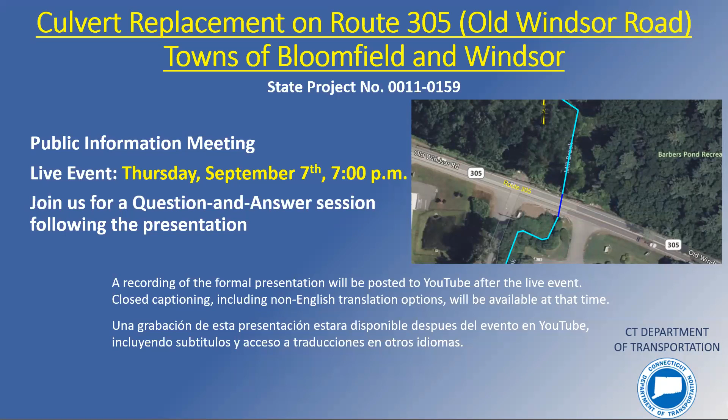This meeting will begin with an introduction of the team working on this project. Then an overview of the meeting format will be provided, along with details on how to submit your comments or concerns both during and after the meeting. Next, we will present the proposed project, including the purpose and need, the design plans, and rights-of-way required, and an overview of constructability and traffic management considerations. Then we will end with a live question and answer session here in Zoom.

Now to introduce the design team. For State Highway Design, Scott Bushee is the principal engineer. Joseph Arsenault is the project manager. Again, my name is Byong Kim, the project engineer. Kevin Osowski is the project designer. For bridge design, Zoltan Kanyo is the project engineer. Matthew Giannakopoulos is the rights-of-way coordinator.

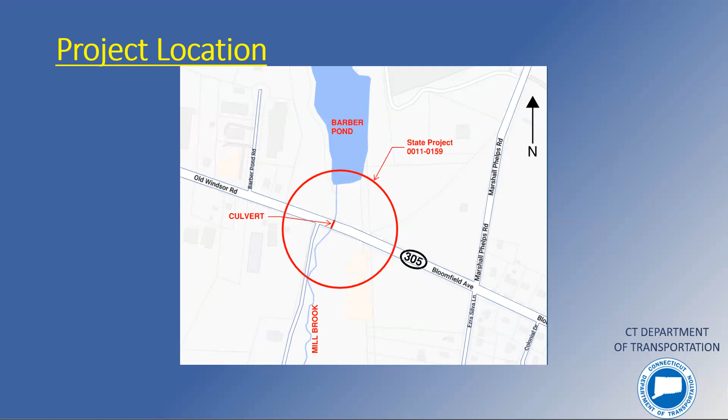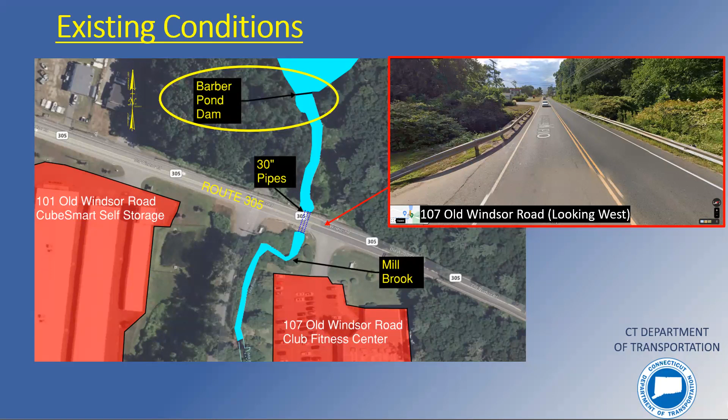The purpose of the project is to resolve the recurring flooding of Route 305 at the Mill Brook crossing. The existing 30-inch pipes are hydraulically inadequate to handle the flow of Barber Pond, resulting in frequent flooding of Route 305. This flooding occurs as low as 2-year storm events. The end wall is also in poor condition at the outlet.

I am going to hand the presentation off to Kevin to talk about the proposed design.

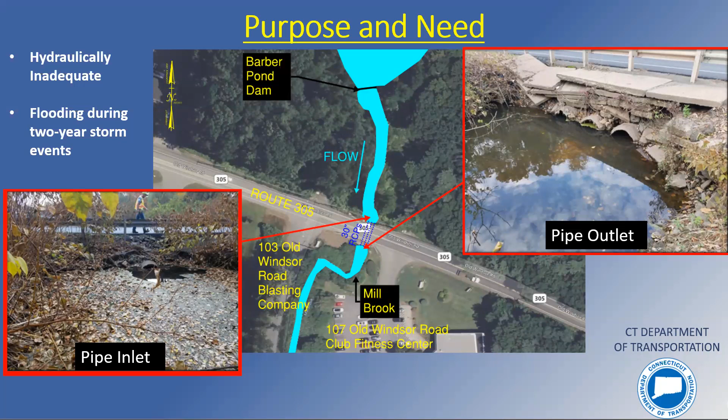Thanks, Byong. Hello everyone, my name is Kevin Osowski, I'm the project designer, and I'm going to go over the proposed changes. For this project, the existing pipes will be replaced with a 20-foot wide by 8-foot deep box culvert. The roadway will also be raised by a maximum of 3.5 feet. These two changes combined will work to prevent flooding, as the roadway will now be above the 500-year stormwater elevation.

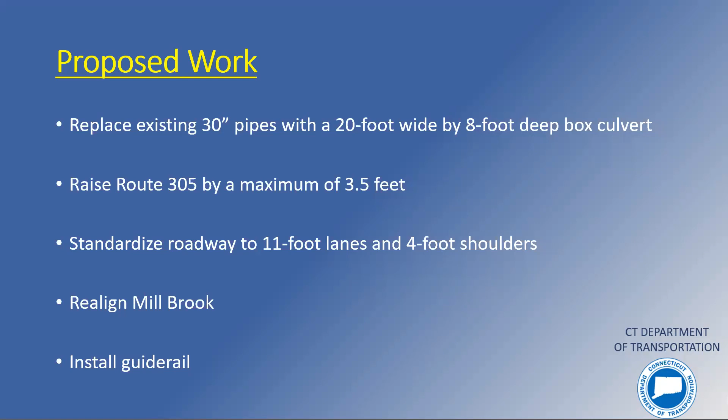Route 305 will be standardized to have 11-foot wide lanes with 4-foot wide shoulders. Mill Brook will be realigned to provide a more direct flow path. Guide rail will be installed along the project where necessary.

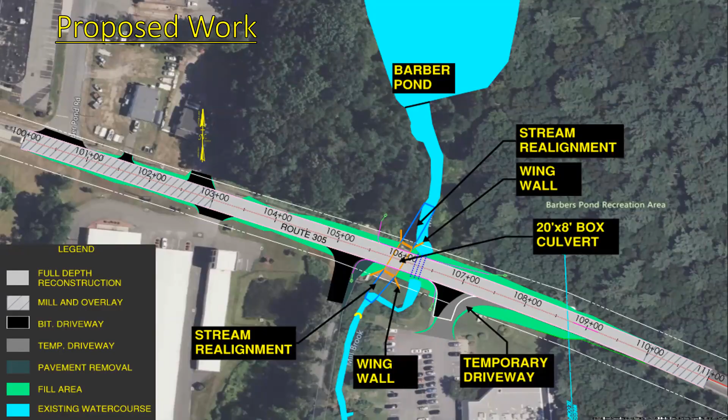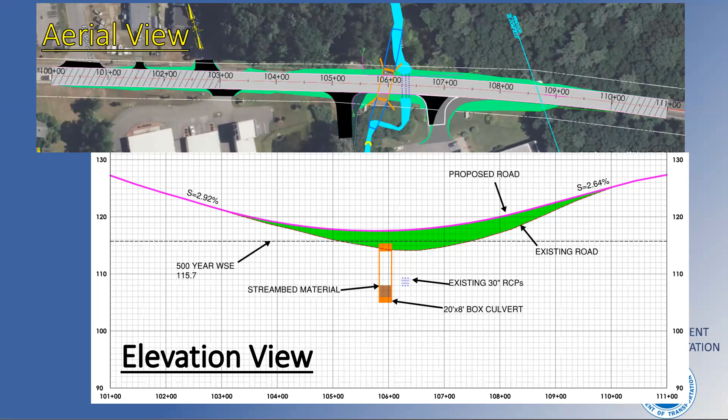This image shows a view of the inlet of the culvert. 2 feet of streambed material will be placed at the bottom of the culvert as shown in orange. The culvert is 20 feet wide and 8 feet deep, with wing walls protruding from each side. It will be made of reinforced concrete.

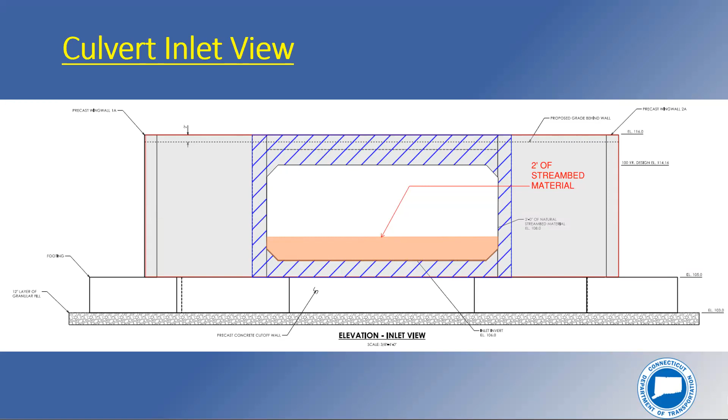Due to poor soil conditions in the project site, this project will be conducted over the course of 2 years. During the first year, the roadway will be raised to its final elevation. In the second year, the box culvert will be installed and the existing pipes will be removed.

This project requires full roadway closures during construction. These road closures will be 2 weeks long during each year. Outside of these detour periods, alternating one-way traffic will be utilized. Access to all driveways will be maintained at all times during construction. The Club Fitness Center lot is the only lot that requires a temporary driveway.

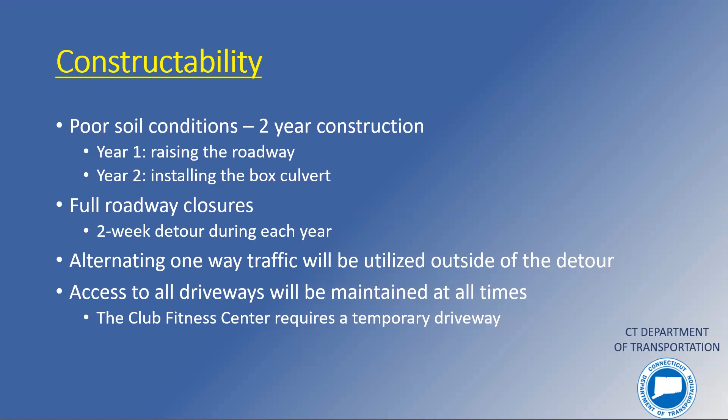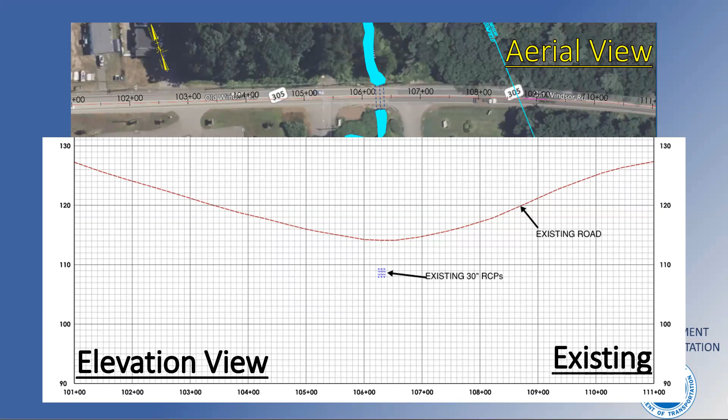This slide shows the existing roadway conditions. You can see the existing reinforced concrete pipes on both the aerial view and the elevation view, shown in blue.

This slide shows the work that will be completed during the first construction season. The roadway will be raised, guide rail will be installed, and utility poles will be relocated. The fill is shown on the elevation view in green.

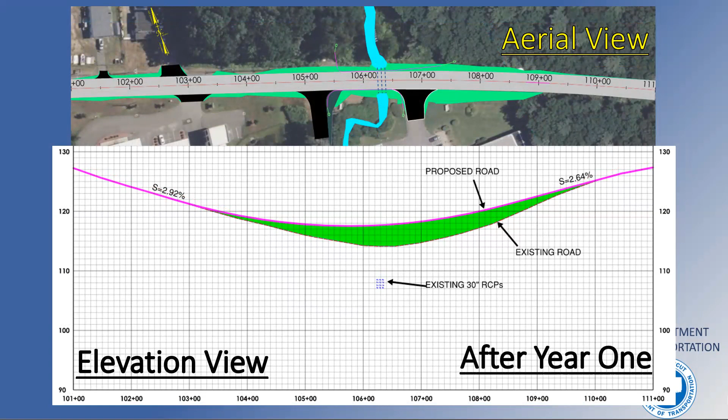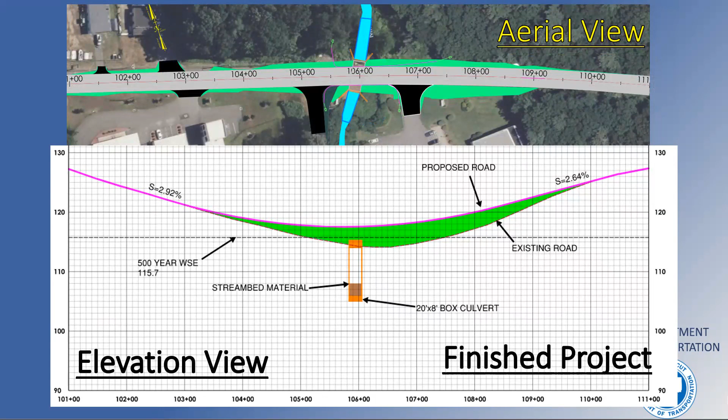This slide shows the finished project of this project. During the second construction season, the box culvert will be installed, the existing pipes will be removed, and the stream will be realigned to its final position.

The utility considerations for this project are as follows. 2 new overhead utility poles will be installed, and 2 overhead utility poles will be permanently removed. 6 overhead poles will be relocated to provide room for construction equipment.

We will be replacing the existing cast iron water main with ductile iron pipe. The underground water and gas mains will be relocated. The water main is shown in blue, and the gas main is shown in orange.

This plan shows the utility pole impacts. Inside of the ovals are the poles that will be the most affected by the relocation plan.

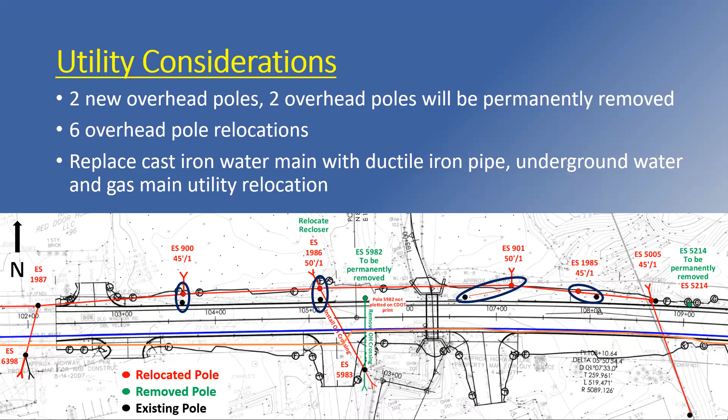This project is deemed to have minor environmental impacts. We are currently investigating the archaeological potential impacts of the soil in the project site, and consultation with Native American tribes will follow. Water quality and handling permits are required for this project, and these include the Army Corps, the DEEP 401 Water Quality Certification, the DEEP Inland Wetland General, and the Stormwater Discharge Permit.

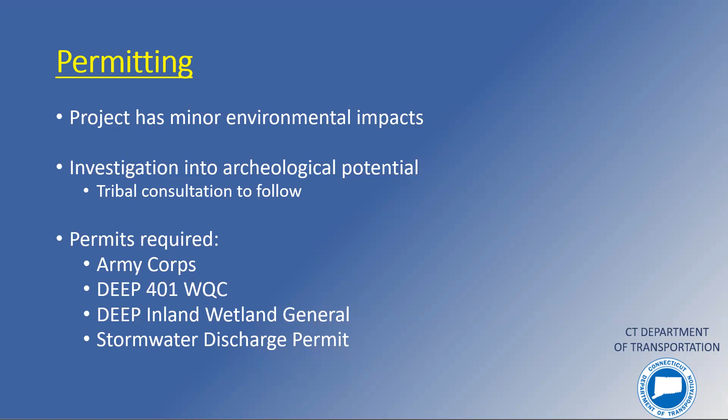I will now hand it off to Matt Giannakopoulos to talk more about rights-of-way.

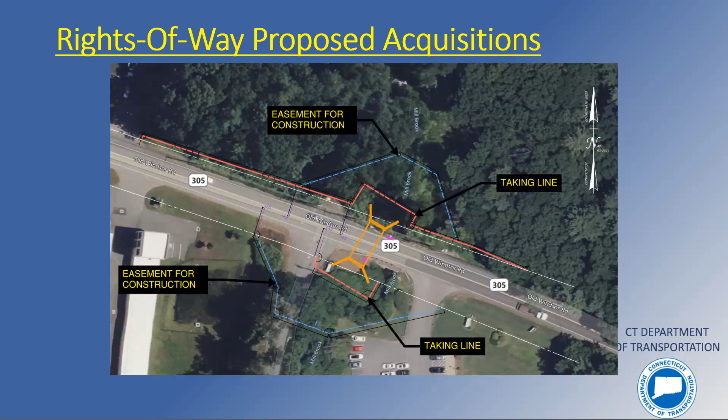I am Matt Giannakopoulos, and I am a right-of-way coordinator with the Department's Division of Rights-of-Way. It is our office's responsibility to acquire the property rights needed for transportation projects. The proposed project design requires the acquisition of property rights, so I'd like to give a brief overview of the Department's right-of-way acquisition process.

Please keep in mind, though, that the specific impacts are still being fine-tuned and may change as the design progresses. Any property rights will be acquired in accordance with Connecticut General Statutes sections 13A-73 and 13A-98E. And whenever there is federal money used in any phase of a project, the department must adhere to the Uniform Relocation Assistance and Real Properties Acquisition Policies Act of 1970 as amended.

Once the design has moved to the point where we are ready to begin the acquisition process, each affected property owner will receive a formal letter of intent to acquire from our office, along with a property map which depicts the exact property rights to be acquired.

At that point, our office will determine the fair market value of those property rights and use that value to establish an offer of just compensation. The offer will be sent out to the owner in writing, and a right-of-way agent will be available to meet with the property owners and explain the project, go over the specific impacts to the property, and explain how the state developed its offer. The property owner will have a reasonable time to consider the state's offer and enter into negotiations.

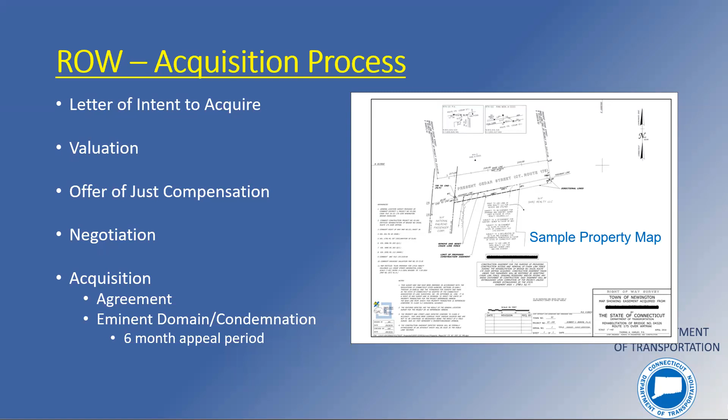Thanks, Matt. I'll now finish this presentation by going over the project cost and schedule. The total construction cost of this project is estimated to be $5.5 million. This project is funded 80% by the federal government and 20% by the state.

The design is anticipated to be completed in July of 25. Construction will begin in the summer of 2026 and end in the fall of 2027.

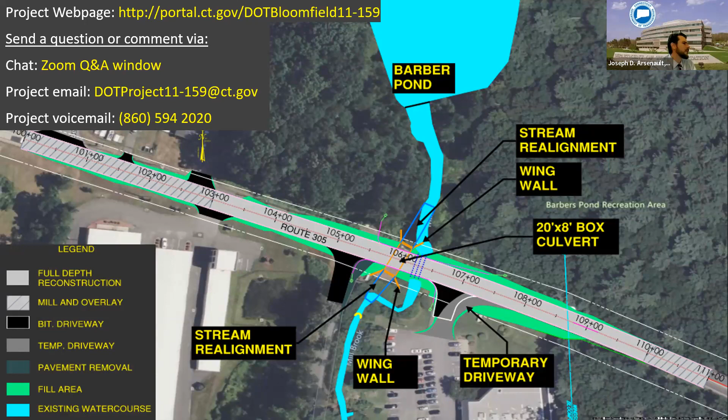Sure, give me 1 second. So I misquoted earlier. It's design completion actually November. It just changed recently. November 25, and anticipate construction will be in the summer of 2026 and end in the fall of 2027.

Okay, great. And that is, of course, assuming that everything goes smoothly with our permitting process through DEEP and Army Corps, and of course, acquiring the property that we need for the project. So those are tentative dates.